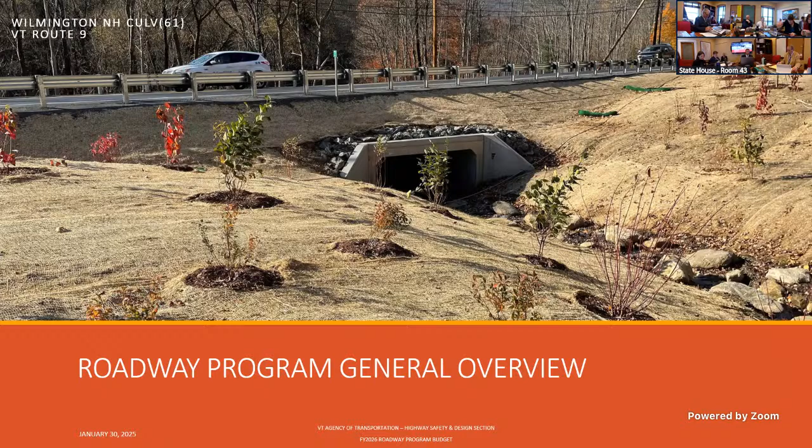The design group charged with the roadway program is the roadway design group, comprised of 10 team members - project managers, engineers, and technicians. In addition to producing plan specifications and estimates, there's a look to ensure fiscal responsibility, delivering projects on time. We have to have quality plan sets to reduce any impact in construction, make sure we're using sound engineering principles. The group is the main point of contact through the design phase.

So we do have a customer service facing side. We're very easily accessible through VTransparency. All of our contact information is on there during the design phase.

We'll talk about the different scopes that fall into the roadway program, very high level. First is roadway reconstruction - full depth reconstructions, the big projects, the big dig type of work. In reality, these are replacing the sub base of a roadway with something engineered, with a lot of structure, producing a new HMA or hot mix pavement engineered to take on all the traffic. That, of course, gets into utilities oftentimes, typically drainage or culvert type work.

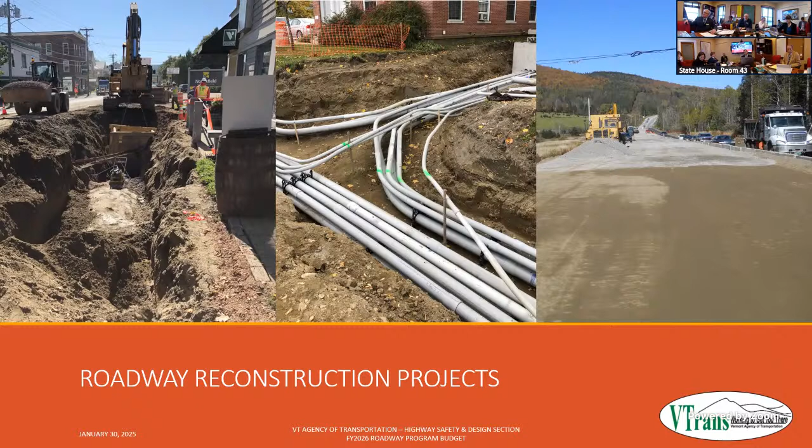A good example of this is an upcoming project, the Pittsford-Brandon project - US 7 reconstruction. You may have heard about it in the past. This will be a removal of the existing roadway and replacement with a new roadway in the same general area. We'll be fixing geometries. It will be all brand new materials from the subbase up, so we design to handle all the traffic there. It will be wider to meet the National Highway typical sections.

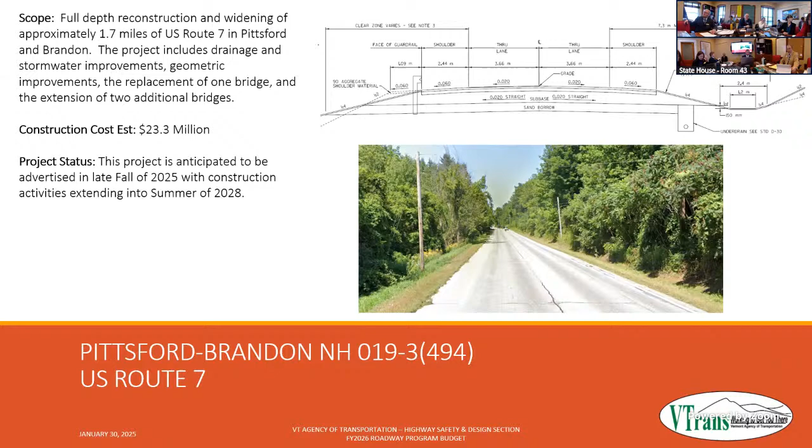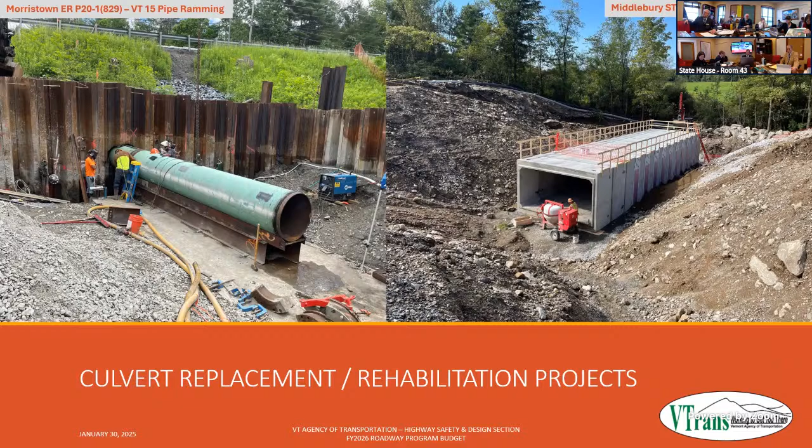An example of the culvert program is the Dow Pond Dam project in Middlebury on Route 116. There was a project listed there to replace a couple of culverts under Route 116. Through one of the flood events, this became more of an emergent need than the original typical capital project.

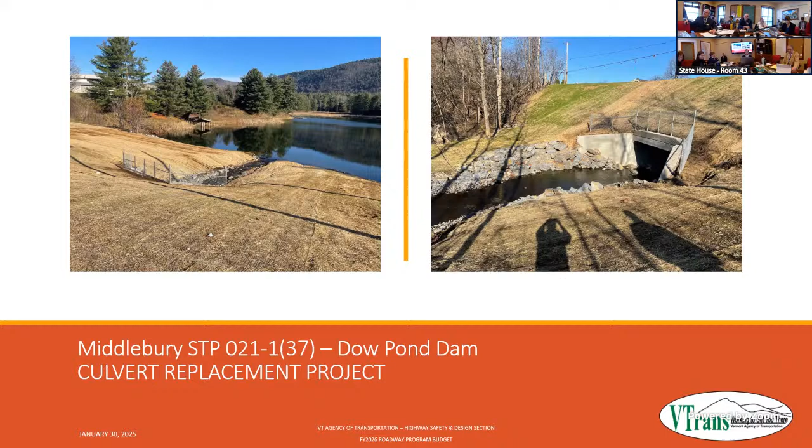So we went in, we had a design plan that was 99% ready, and we were able to use that to replace the culvert and get the road back open, get 116 back open. So that's what you can see on the right-hand side of the picture, the new concrete box that was put in. Just a couple of final images on the inlet side, on the pond side, and then on the right is the outlet side of that new concrete box.

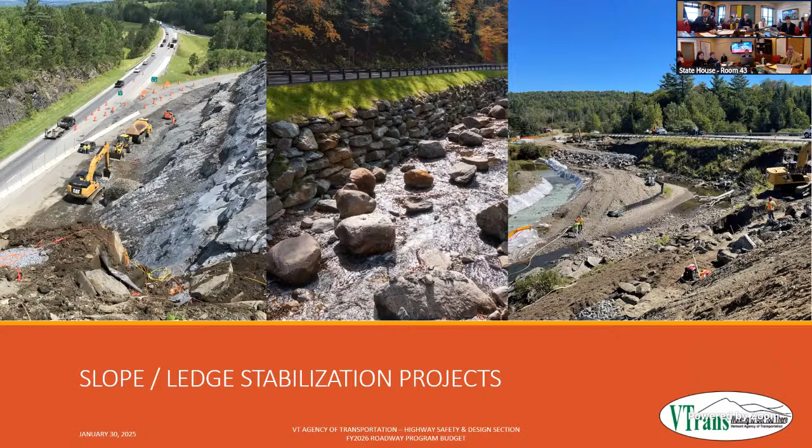A sample project of this, which hopefully shows the perspective, is the Fairlee project. It's a rock cut on the interstate next to Interstate 91. This is a massive project where the slope is currently unstable. So we're working to go out, do some scaling, remove some of that loose rock, and then put something back in that's stable. I want to point out, if you see the little Matchbox car looking things on the roadway in the picture all the way to the left, those are full-size cars. That just gives a scale of the size of this project - it's very, very tall, very, very large. We're planning on going out to construction with that this summer.

All right, on to the numbers. For fiscal 26, there is an appropriation of 67.66 million, which is a slight increase compared to last year, about $600,000. This funding will support 3 different phases of project development and construction.

Kind of let the cat out of the bag on that one. So there's the preliminary engineering phase, which is the actual design of the project, the contracting, the estimating. There's the right-of-way phase, where we are purchasing right-of-way or getting easements to be able to construct the project. And of course, the movement of dirt being the construction phase.

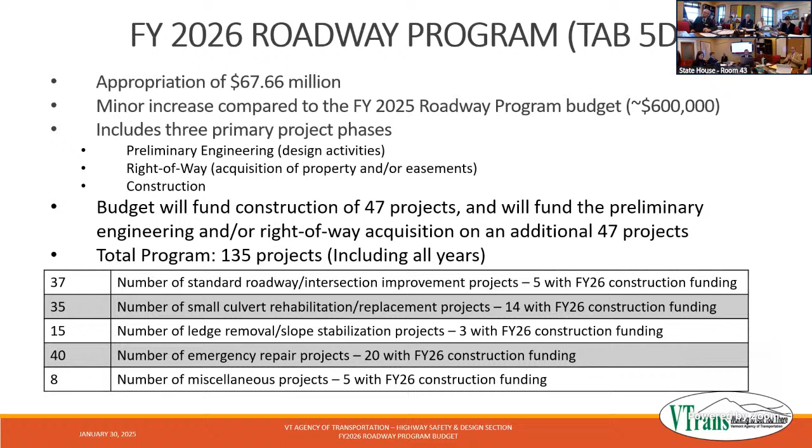The remainder of these projects are mainly dealing with asset condition - something has deteriorated to a point where we've programmed a project to either repair or replace that asset, to make sure it stays in good shape or is repaired up to new standard, keeping the roadway in the shape that it needs to be.

What's the biggest ticket item? Is it Fairlee at 13.1? That's new - the biggest new ticket item, I would have to go back to double check. I am sure that that is up at one of the top.

I understand that a lot of the new ones, or most of them, are emergency repair or flood related, that's in the book, or the condition has gotten so bad that we had to put it in. So our regular plan, since the flood 2-3 years ago, that stuff's had to be pushed a fair amount. What we would have otherwise been doing gets pushed more, and what we're doing is what we have to do in effect. We're talking about what we can and can't get done on our own infrastructure, and how far behind is this going to put us?

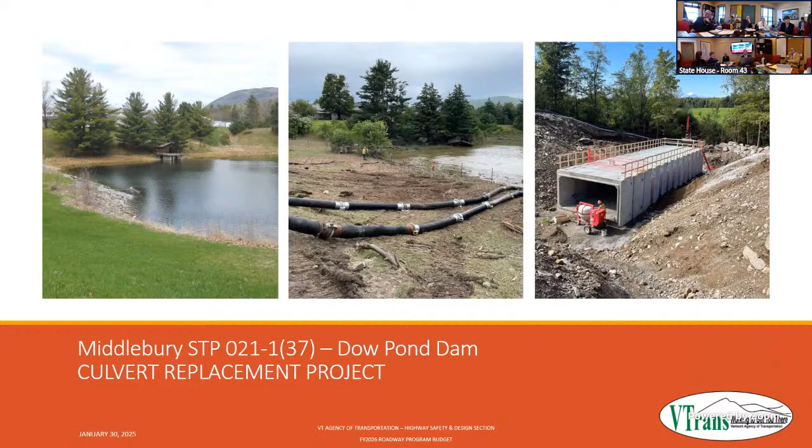Yeah, so when a culvert project takes place, I don't know if I can pick one out, but I'll go back to the Dow Pond Dam. In this particular example, the culverts that were there were undersized, and there was a hydraulic study to analyze how large of a culvert needed to be put in place. That included some aquatic organism passage into the number. So when we're looking at a culvert and doing a full-blown replacement in that magnitude, there is a hydraulic study that does go into place.

There are a few on the list that are, for example, on the bottom left column, there's Orwell Addison STP Culvert Pren 153. That is more of the replacing kind, and the intent of that project and many of these projects is to replace culvert assets ahead of a paving project coming through. So where Orwell Addison, Middlesex, Worcester, there's a few other examples, Essex Town, Fairfax, these are stretched out over multiple towns. That's a pretty good indication that these are asset replacements, generally in kind, to take care of something that's aged or deteriorated before we get there and do a paving project over top of it, hopefully avoiding that pavement cut eventually.

Now, were you directly involved in that Dow Pond project? I was not. Okay, got a couple questions about that one. We handled some of it. I can get you in contact with the person. It's pretty general, but yeah, thank you.

Sure. Representative Burke? Yeah, I have a question. So I know that there are several projects in Brattleboro that are in the paving budget, and I'm now understanding they're listed here with $0. I mean, is there some reason why they get listed in paving and roadway? I think it's a paving project, but I just want to understand why they're listed, because I think it's pretty much the same projects that are in the paving listed here with $0.

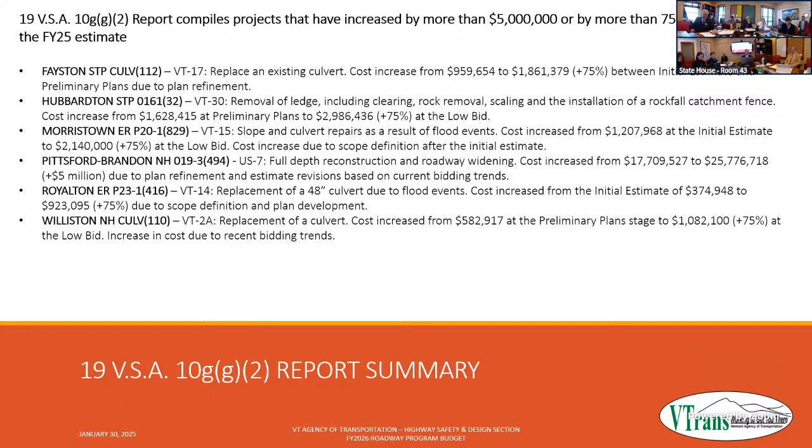Moving along to the second of the expansion 10G reports. This is a comparison of the preliminary plans estimate versus the current estimate—projects on this list are triggered by an increase of $10 million or more, or 100% from the preliminary plan estimate to now. There are a couple of projects here that I want to lump together in the discussion.

That's the Burlington MEGC M5000 Pren 1 project and the Essex Junction STP 5300 Pren 13, commonly known as the Champlain Parkway in Burlington and the Crescent Connector in Essex. These are substantial increases from the preliminary plan phase or the preliminary plan estimate.

Part of what's going on here is the age of the estimate. The record of the preliminary plan estimate in Burlington was 2016. For Essex Junction, the record was 2014. Since then, the model of construction has been putting separate contracts out and building these in phases, and that's kind of built into why these have increased from that preliminary plan estimate to where they're at today.

The Crescent Connector, for example, that was built in a couple of different phases. So there was a railroad crossing phase of that project, and then there was also the building of the roadway and installing new signals.

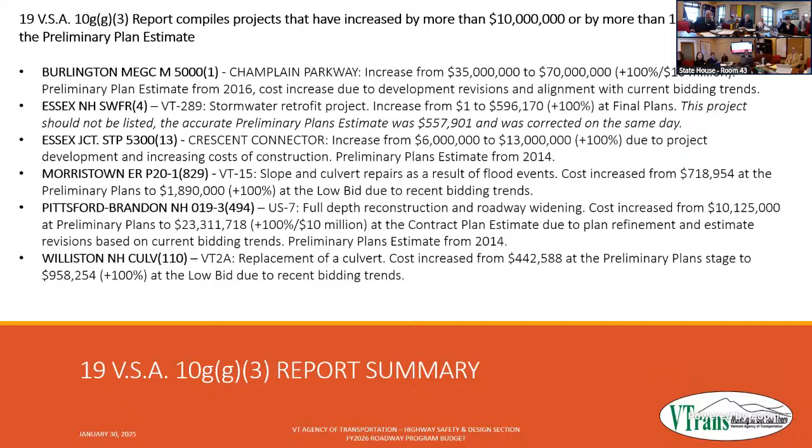All right, moving along. So the next section that we're going to take a look at is the traffic and safety program, which is the traffic design unit. This will be tab 5E in your white book.

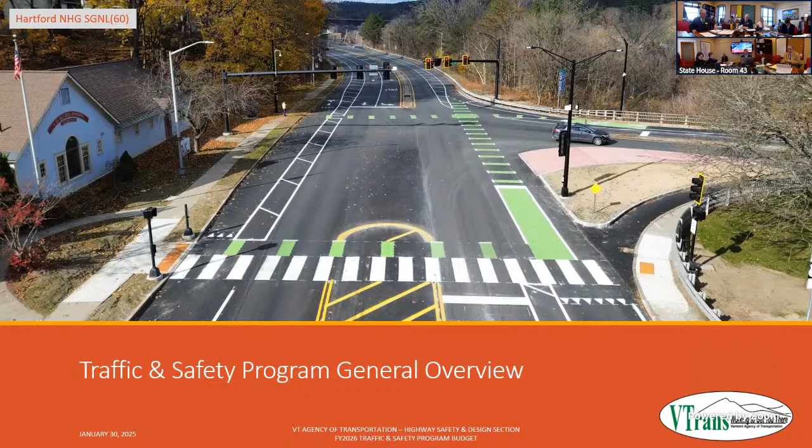Just throwing up a picture of a project that we will talk a little bit more about. This is the Hartford NHG Signal Pren 60 project, which was completed last fall.

Not a lot of difference here in the mission and what traffic design is tasked with. Again, they're creating plan specs and estimates to build these projects, and they're increasing or ensuring safety, mobility, and keeping assets in good condition or replacing them with something brand new so that they stand the test of time.

Traffic design group working primarily within the traffic and safety program is comprised of 9 team members, which are project managers and engineers. And very similarly to the roadway design group, they're also responsible for fiscal responsibility, making sure that projects stay on track, on time.

They're ensuring quality plan sets are being produced, and just like in the roadway program, they are the first point of contact throughout the design process. Their names are also listed on VTransparency on the map view, so their contact information is out there for the public if there's any questions on any of the projects that are out there.

As I noted, we're going to talk a little bit about some of the scopes of work. So within the traffic group, much of the work is focused on intersections, and that can be either changing the type of intersection control or potentially modernizing what's there.

In the case of the Hartford project, which is shown on your screen, there were 2 different types of work that took place. The bottom left picture is near the Hartford High School. There's 2 signal systems there. They had existing mast arms, they had a decent cabinet, but the hardware had aged.

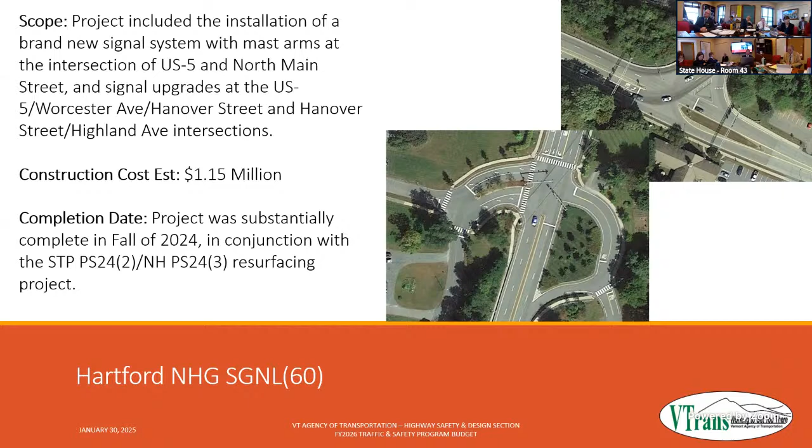Showing a little bit of a difference in what was out there. This is back at that North Main Street intersection. So on the left, you can see the signals are really hard to see as you're coming down US 5. This was one of the older signal systems in the state. I don't know that it was the oldest, but it was definitely on the top of that list.

To the right is the new signal infrastructure, which, as you can see, it puts the signal heads out across the road. They're very conspicuous as you come into that intersection. You know what's going on. And that's really what the intent of that project was - not only replace that aging infrastructure, but increase the safety.

Because this project was done as a composite with a paving project, we also had the ability to make some changes to the lanes and increase some of the bike and ped infrastructure as you go across the road.

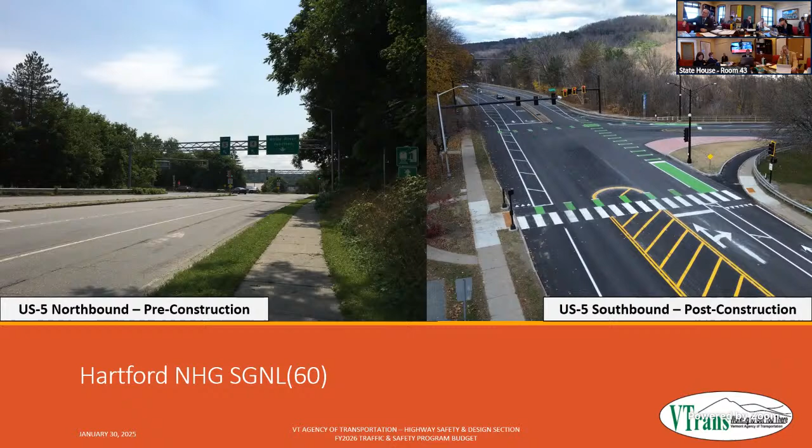To that point, we were able to install a bicycle actuated crossing signal at this location. So much like what you would have with a pedestrian push button, or if you come to a signal, you push the button, you wait for the walk symbol. This is kind of the in-between of a vehicle signal and a pedestrian signal.

So bicyclists would come up to this intersection, press the button on the edge of the road, which you can see on the left-hand picture here, and they would wait to get a bicycle signal. Probably a little bit hard to see, but the signal face on the picture on the right is actually a symbol of a bicycle. So much like you would get a walk symbol and then a countdown timer, in this case, you have a push button, you wait for a green bicycle light to show up, and then you would get your time to cross the road within the bicycle lane.

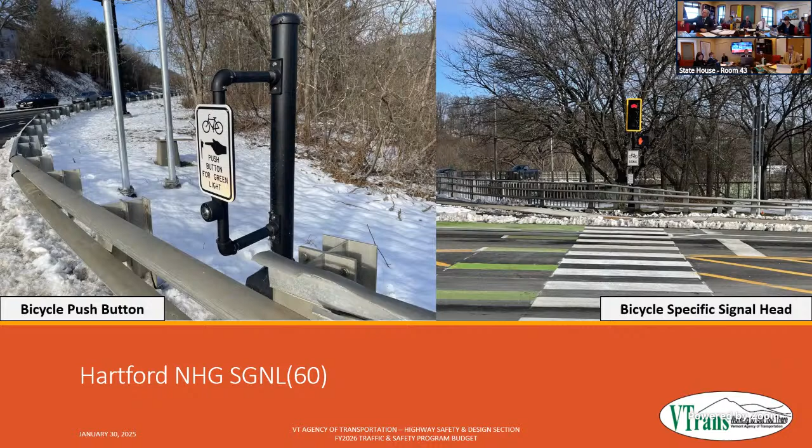I'm going to jump ahead since I put these out of order. So the furthest up on the traffic and safety or traffic design type projects is really full-blown rebuilds of intersections. This is one example of some of the more complex work that group does, a full-blown rebuild to a different type of intersection control.

This project is down in Bennington. We lovingly refer to it as the peanut roundabout, given the shape kind of looks like a peanut. So this is taking the geometry of the 5 roads coming into the intersection and allowing vehicles to transition through. It's got the right radii so that trucks can get through. It was advertised this past summer. We'll start building the project this coming spring, and construction plans to extend through 2026.

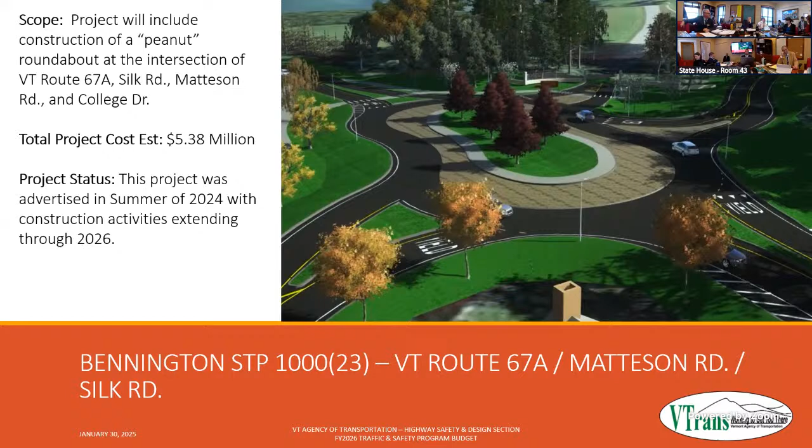Quick question while we're on Bennington roundabouts. Glad to see this is finally moving forward and the contract's been awarded. There was scoping on Kocher Drive and Route 7 in Bennington for potential 2 or 3 more roundabouts, and there was funding in there last year for scoping, but I don't see it in this year's budget. Was that taken out? I am not aware of that one, I'd have to look back. There were 3 spots right on Route 7 heading out of town, one by Aldi's, and then one further down. Just curious where that is. Sure, yep.

All right, jumping back up here into the data. Again, this is on tab 5E, the traffic and safety program. The fiscal 26 appropriation is $45.83 million, which is a decrease of 4.8 million compared to last year. Very much like the roadway program, the funding will go towards the design activities or preliminary engineering, the acquisition of property or easements being the right-of-way phase, and then the actual movement of dirt being the construction phase.

What this translates into in terms of projects is the funding will help with the construction of 14 projects, shown in fiscal 26. It's also continuing the design and right-of-way efforts for an additional 37 projects. As a comparison, we have 61 total projects in traffic and safety spread across multiple fiscal years. There are 48 of those intersection type improvement projects, a big catch-all for the different scopes I talked about previously, which can go from signal hardware upgrades up to the large and complex rebuilds of intersections, like your peanut roundabout, like the DDI in Colchester.

7 of those 48 are showing construction funding in fiscal year 26. We also show 9 sign replacement projects, at the asset level, replacement of signs that have aged out, 3 of those have construction funding in fiscal 26. And then we have annual marking projects. There are 4 of those currently in the program, and all 4 will show 2026 funding.

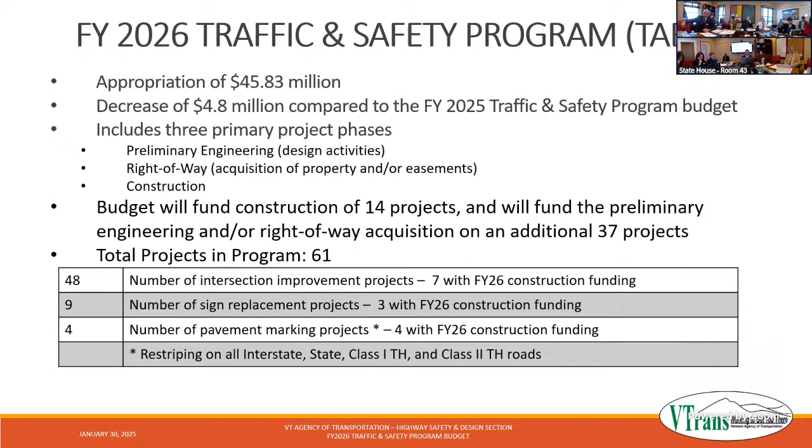On to the 10G reports. The first are new projects added to the program after fiscal 25. The project that showed up here is a no-build project, the crash reporting HWCR PREM 333, which is the crash reporting system tool as well as consultant support and program maintenance. This is not a project that will be built, but rather one looking at safety across the network, potentially identifying other projects that would be built.

Thanks, I was going to ask about these intersection improvements and how you prioritize them. It sounds like some are based on infrastructure, the signaling being so old it needs to be upgraded, and then you look at the intersection. But some of these must be based on crash data, safety data. I'm curious, is that true, and how is that data put together? Can you see a list of crash data associated with intersections on state roads? Is there a heat map or something that shows those, and would that data feed into the priority of these projects?

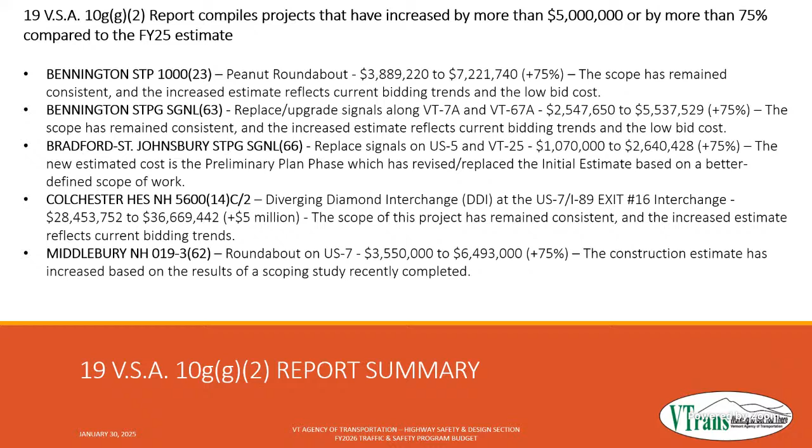All right, I'm going to jump into the final of the 10G reports in the traffic and safety program. These are the projects that have been closed out or finished. In all cases here, these are projects that have completed their work, so they're not showing funding in fiscal 26 because the work is done.

And finally, we will jump to the paving program. This will be tab 5A in your white book. I apologize, you have to go backwards. Next year, hopefully I'll put these in numerical order. So we'll run through the overview of the paving project. This is a picture of a project that was completed last year, the Brattleboro Newfane reclaim on Vermont Route 30.

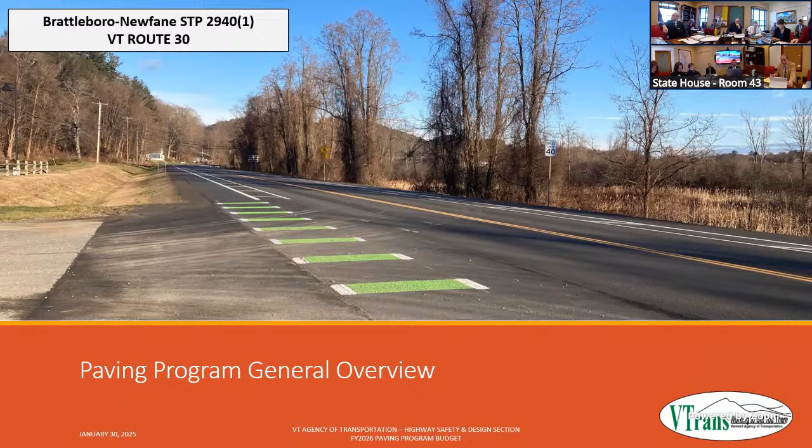Very much the same in terms of the mission. The group's goal is to produce plan specifications and estimates for the delivery of projects. The focal point is the safety, mobility, and asset condition of our roadways, typically in a longer linear stretch. As a group overview, none of the bottom information has changed. They are looking at on time, on budget delivery of projects, quality engineering, and are the main point of contact for the public in case there are any questions. Teams are made up of 6 different team members: project managers, engineers, and technicians.

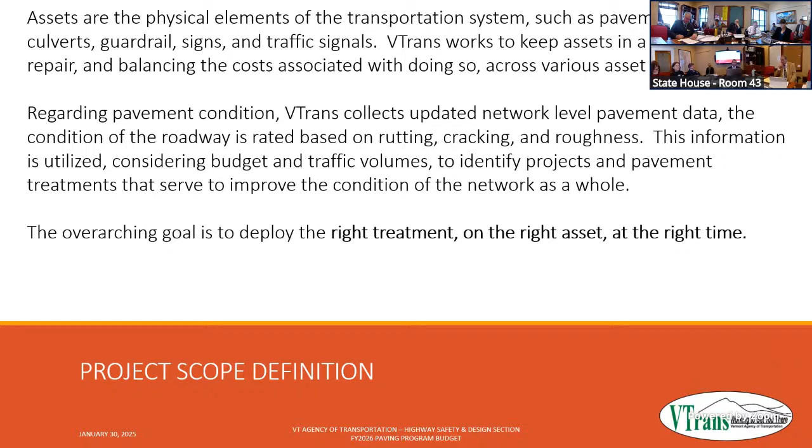So the paving group is really looking mainly at asset conditions, trying to keep roadways in good shape or improve the condition of roadways that have fallen into poor or fair condition. The projects programmed within the paving design unit are based on actual data from collection that takes place either yearly or every other year, depending on the roadway, identifying where those needs are for the asset itself. The overarching goal of this group, something you hear at many or most of the conferences anybody goes to in the pavement design unit, is right treatment on the right asset at the right time. That really defines how we move forward with these projects.

There are things we do involve in these projects when we're ensuring we're placing the right treatment on the right road at the right time, so other assets can be pulled into the project where they will fit and won't change that operating mode. So we often include culvert replacements, either shoulder widening or shoulder rehabilitation to get a consistent shoulder. Oftentimes there's pedestrian crossings, always guardrail improvements, whether fixing guardrail that's out there or replacing with a current standard. Most projects we install centerline rumble stripes to improve safety, a low-cost safety improvement. Sometimes we have the ability to improve intersections with these projects. So it's really just making sure we're putting the project out on time and within the cost initially set.

Representative Burke? Yeah, I've talked to Jeremy about this too, but I had some questions. When, like you just said, sometimes you can do other improvements while doing the pavement, could that include crosswalks, or narrowing lanes and making a wider bike lane or something like that?

Is that a possibility? It is something we do look at on paving projects in many cases. The typical project is trying to create a consistent lane width and consistent shoulder width. Sometimes that's transitioning down from what was originally a 12-foot lane but may have meandered over the years to a 13-foot lane, and we're going back and defining an 11-foot travel lane with a relatively consistent shoulder width. So it's something that definitely happens with most paving projects, really a definition of consistent lane width and hopefully a consistent shoulder.

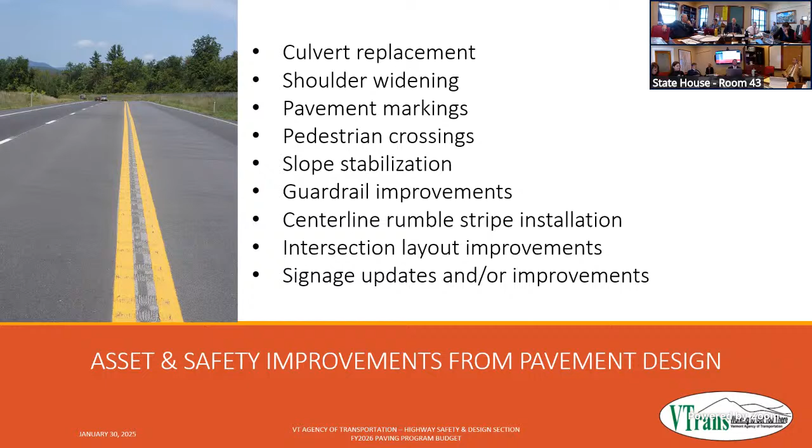Not sure how we're doing on time. I can quickly get through the last few slides if you're okay with that - 8, 9 minutes, sure, I can go through quickly and tell me if you have any questions. So if we're good to move on, sorry.

Okay, very quick highlight. This is the Route 30 project that I mentioned we would talk about earlier. This is an example of looking at the project - the need out there was to address the surface condition of the roadway. We had a fairly tight scope in that we needed to stay within the right of way, we needed to not increase the impervious surface, and we needed to create some type of roadway that would stand the test of time.

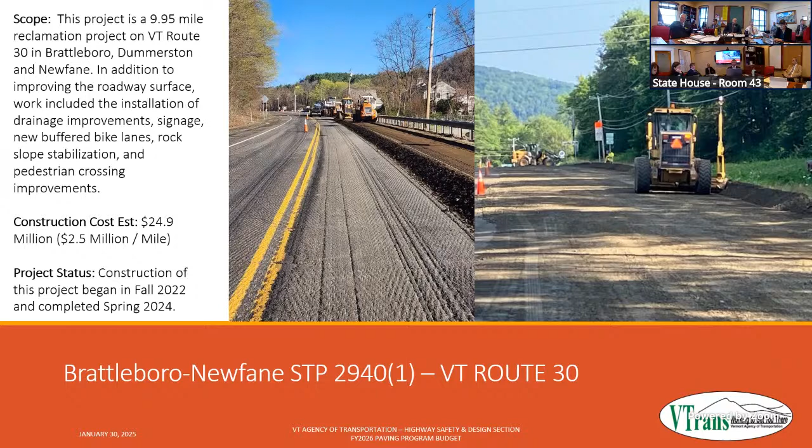Best choice was a full depth reclamation, which you can see taking place in this process. It increases the strength of the subbase, puts on a new pavement thickness on top, designed to handle the traffic. Pretty big scope of work, but we still had those bounds of remaining within the right of way so that we don't delay the project - it needed to be put out there on time. With this type of work, we are homogenizing some of the existing pavement with some of the subbase to create a nice, stable, strong layer.

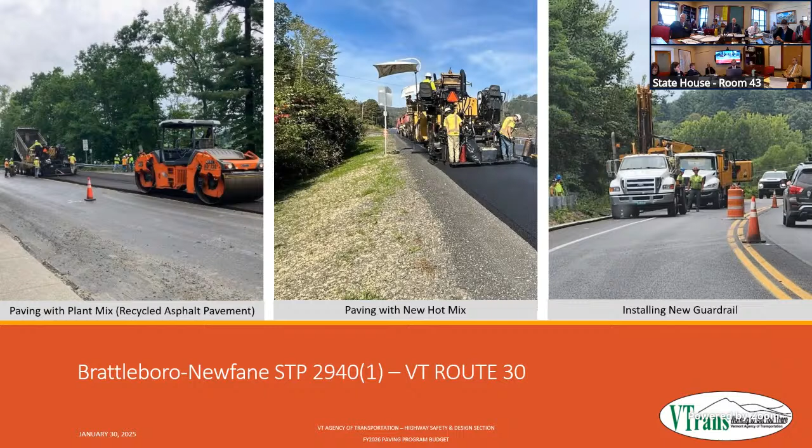We also go through with many of these projects and place back what we call plant mix, which is recycled asphalt pavement. So we take some of those millings and replace them on the road, pave with new hot mix, and then install guardrail. Basically what you'd think of for a paving project: get rid of the old, put something new out there.

Keeping in mind right treatment, right road, right time, we also knew of a couple of different assets that could be looked at within the project. To the left, you see we're rebuilding a sidewalk, mostly due to the actual construction taking place. We couldn't easily do the construction without impacting the sidewalk, and it fully fit within our right of way, so we said, remove it, do the work on the pavement, and put back a brand new piece of sidewalk.

The biggest addition, really a matter of having the ability to work within an existing right of way, was a rock slope higher on the priority list within the limits of the project. Through further analysis, we found we were able to stabilize that rock slope, creating something safer, getting a bit more room from the edge of the pavement, benefits on snow storage, and keeping rocks away from the road, which is a safety improvement. Because we were aware of that asset, we had the ability to do the work with the paving project itself.

Finally, on pedestrian infrastructure, we were made aware of another crossing needed in the area. This is down on the Brattleboro end, where we added a new crosswalk and new RRFBs along with bicycle infrastructure between some points of the work.

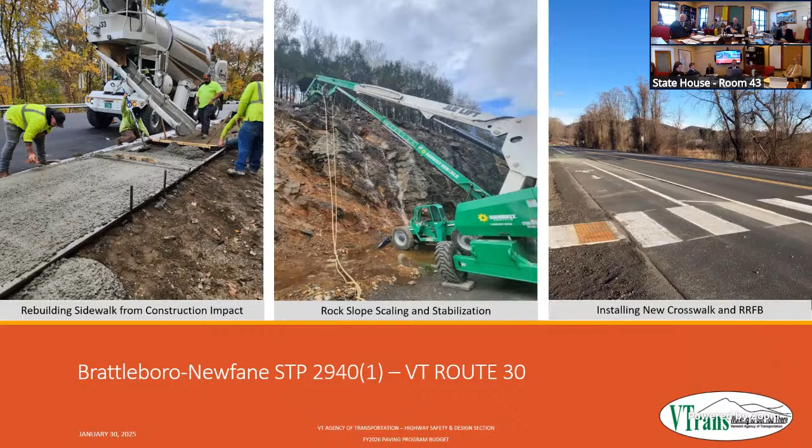All right, so last few slides here, getting into the numbers. For fiscal 26, we have an appropriation of $102.91 million, which is a decrease from last year of about $27.23 million.

Much like the other programs, this will fund three phases of work for the projects: design activities, right-of-way activities, and construction. I'll note that right-of-way in the paving program is extremely limited. It's a very rare case that we're getting into right-of-way impacts and needing to fund that line item, but there are cases where we are doing that.

What this translates to is the budget will fund construction of 46 paving projects and will fund additional work on an additional 34 projects. Rather than break down the types of work on these, I broke it down to what the money is doing, or how far it's going to go.

With the funding in fiscal 26, we're anticipating 71 miles to be paved on the interstate, state, and class 1 systems, and 31 additional miles will be under that federal leveling or mill and fill type project, so in total, 102 miles. It's worth noting that because the funding year split is on July 1, that doesn't align well with the paving program, so this is really just looking at calendar year 2025, or construction season 2025, to pull these numbers out.

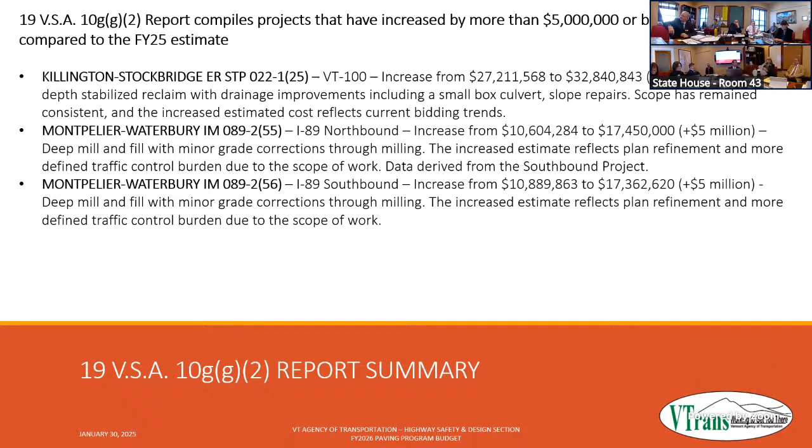How many less miles are we paving this year as opposed to the 71? I was just wondering that. I don't remember off the top of my head, I should have come with that. Sorry about that. If you could email us. Sure, that might just come up for discussion. Yeah, I forgot to grab last year's figures for this year. Probably on Bennington. Oh good, I feel there's one going to be paving north of Burlington and south of Rutland. Yeah, there we go.

All right, where should we?